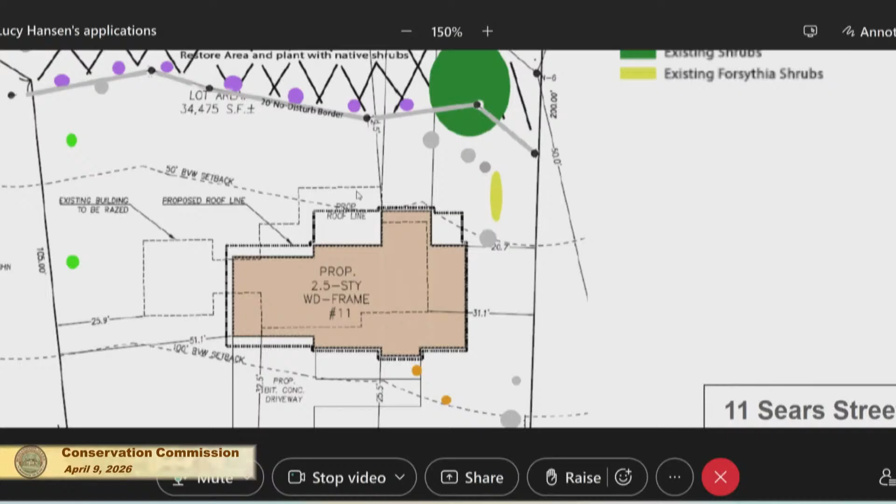We're gonna move the property over slightly to accommodate that further, and only the 2 small ones in the very front, those are the only 2 that will be removed, to be replaced by 2 other native trees on this side of the property, which is a pretty wide open area right now between the 2 property lines.

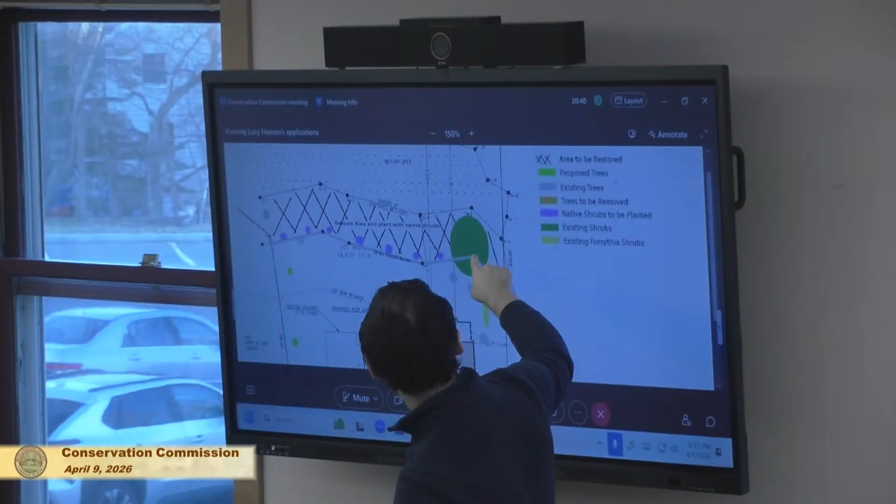Additionally, the rest of this landscaping plan shows other existing trees here in the back right corner of the property. There's existing forsythia shrubs and other green shrubbery in this area next to the wetland area. The committee asked for a 20-foot no disturb border adjacent to the wetlands, which we are fine with, the 20 feet, with the proposal for native shrubs to be planted along the edge of the no disturb border.

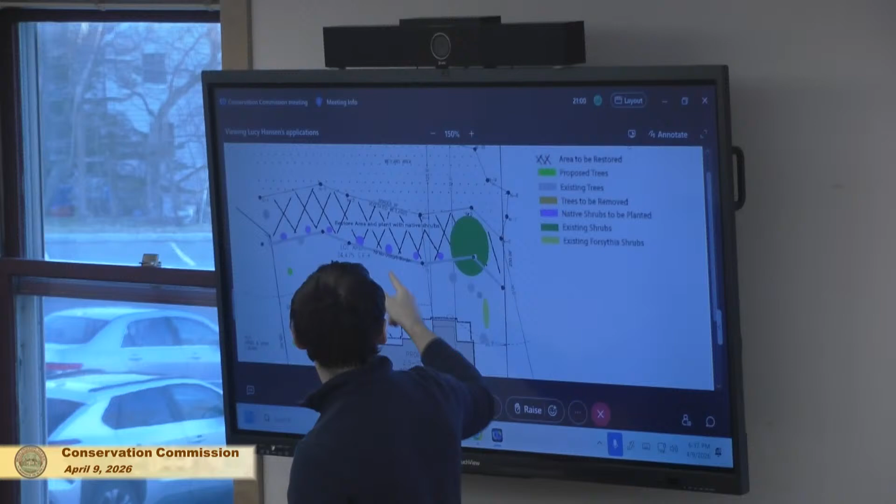Any questions about that landscaping plan? Okay, first we'll go to these people over here, our staff, and then we'll see if anybody else has any. Sure. So Lucy or Eileen? Any questions? No, we weren't sure who was dealing with this. I don't think either of us have any issues with that landscaping proposal. I think it's good. I think he did exactly what you asked. Right. Okay. How about on the commission?

Anybody on the left? Indra or Rob, you have anything further on this? We asked for the 20-foot no disturb, and they provided it. Bill, how about yourself? Nope, I'm happy. Okay. Sarah? I'm delighted to hear you're saving that big oak. Just maybe think of putting some protective things around it, like sometimes people put dumpsters right at the foot of a tree they're trying to save, and that can be a little counterproductive. Just the only thing to consider, but other than that, no issues.

Okay. I can take that note for them. I mean, the front and the left side are the widest parts anyway, so I would be very surprised if they went over there, but I'll take that note for them. Okay, Ed, anything on this? I just either have a point or a question. You're planting lots of shrubs, and behind the shrubs there's like 19 feet. So isn't it the intention that that area would be left unmanaged? That's what you're proposing to do? Yep. Right, so you're not putting mulch down or anything like that? No. Okay, that answers that.

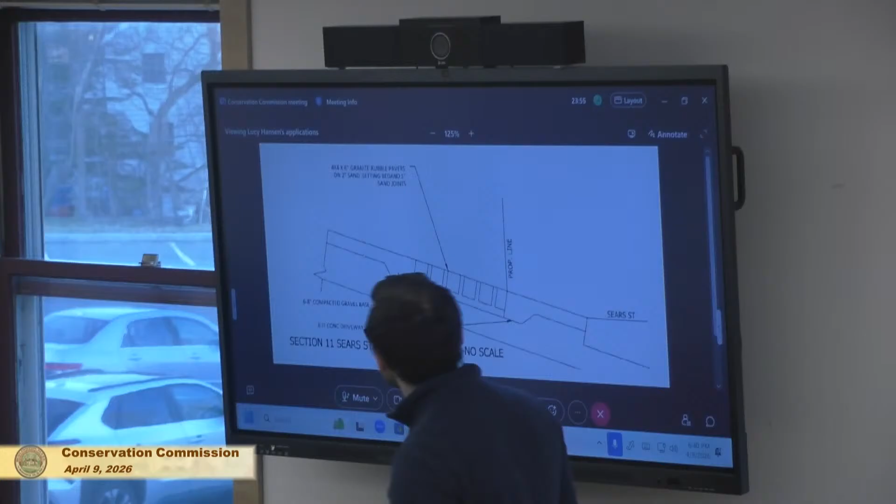Okay. So, the second item from the committee was to provide more detail for the pavers. So, Robert had sent me this update. So you have Sears Street here with the property line. He has 4x4 by 6-inch granite rubble pavers, a 2-inch sand setting bed and 1-inch sand joints with a 6 to 8 inch compacted gravel base, and the driveway with thickened edge. The ask was for more detail. Were there specific details that were being looked for beyond that for the pavers?

I don't remember them asking for more. Eileen or Lucy, is this sufficient detail with what you need for the record? I think so. If your engineer was here, the question I would have would be to double check that the compacted gravel base is permeable enough to get water through, but as far as the detail goes, this is fine.

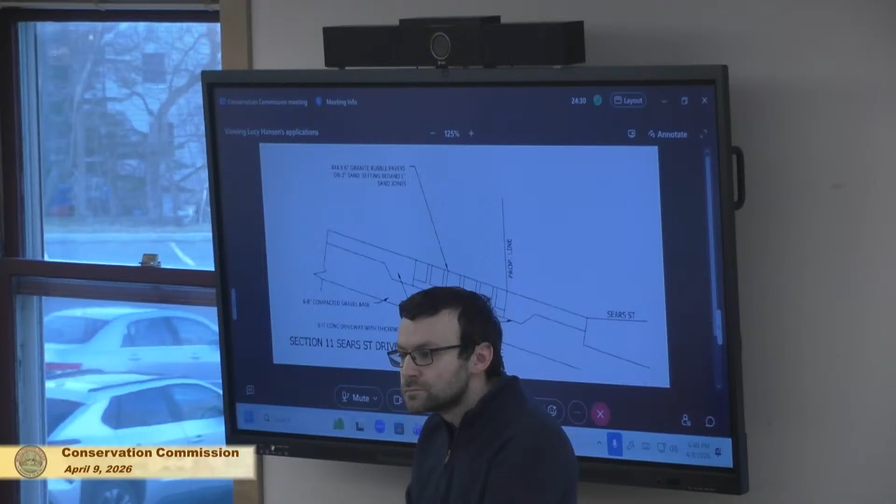And I would assume it's gravel. I would expect it to be on a looser gravel base. Where's the water going? Is it going down to a looser gravel, or is it going into something like a chamber, a dry well? It's just going down there. Right. But this is also they were reducing the impervious, so this is just something we asked for to capture some water, so it could be arguably directing water out also.

This wasn't the discussion we were having about the water table for the dwelling itself. This was for the construction, I believe. I think we're fine. I think it's fine. Yeah. Okay. This is the driveway. Thank you. So that's the last one I have an image for.

Lucy, thank you. The last item was in regards to the water table and water mitigation, since the proposed depth of the basement was about 8 feet for the foundation, and the water table is about 4 feet below the surface. That item, we do not have anything on paper yet, still working that out with the architect, but the plan is to install a French drain system with a dry well basin to capture that water away from the dwelling. So again, I don't have that on paper yet, but that is the plan. So if there's any feedback now before that gets on paper, I'm happy to take it.

That is our proposed mitigation. He said he does have chambers, right? It was previously proposed, yeah. We have comments on that. Well, our comments, just as staff, would be, he knows he has to do a system that's approved by the building commissioner for the groundwater. Our comment would be just to make sure that if they're considering combining that with the stormwater mitigation system, that has to be sized big enough for both. You can't just put it in and assume it's going to work, because it won't.

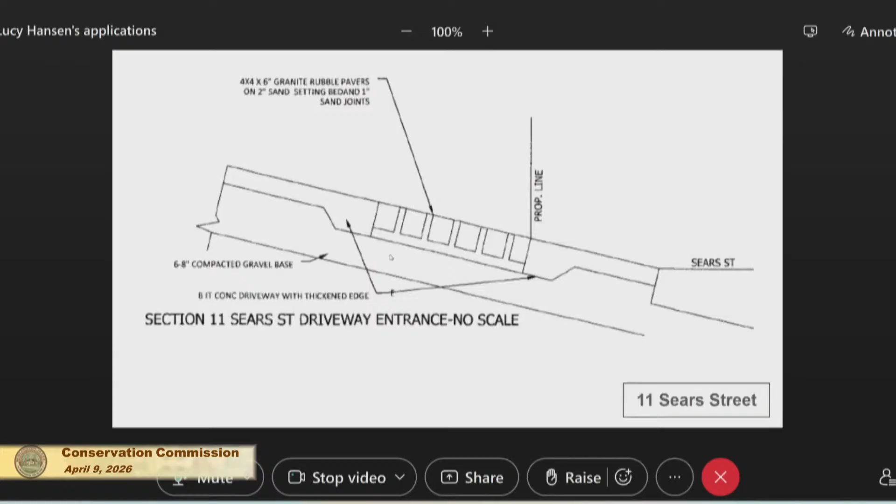I would just suggest your engineer provide a spec for the contractor to follow of what it should be. A spec for the size of the gravel? Right, for adequate drainage, so that it works properly. There's probably a range over which it works, but you don't want it to be impervious, then all that dirty stormwater goes into the street theoretically. Okay?

That's all I have. This is 11 Sears Street, I think. Is there anybody in the audience that has a question or a comment? It's a public hearing, so you're entitled to say something. I guess not. I have one more question. Where is the output from the sump pump going? They haven't designed that yet. Are we approving this tonight? We would suggest not. Oh, okay, good. Where's the output of the sump pump going? We don't know yet.

All right, so it looks to me like we could wrap this up and bring it to a vote at the next meeting. You okay with that? Yep. Gravel size specification and the details on the French drain system. Right, can do. And we'll want a location on the discharge of the water. This is for the mitigation, correct? Yes. All right.

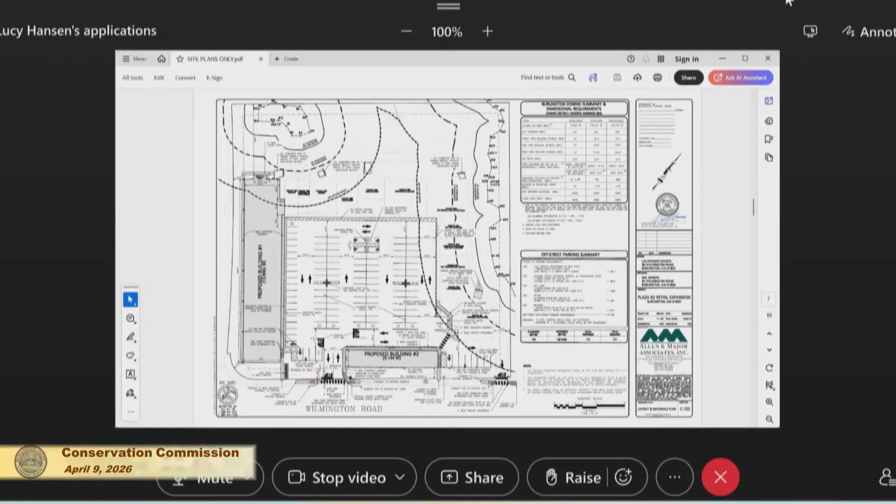I think sheet C102 is fine. It's the layout plan. I know the commission's familiar with this property, so I think we can go everything off of that. Come on. It's moving real slow. Well, everything was combined in one thing. I extracted those site plans and it still is taking so long. Perfect. Yeah, that's good right there. We can go off that. Okay. We can motor around as needed.

Perfect. So to kick things off, this is 85 Wilmington Road that you see on the screen here. It's better known as Plaza 62. As the commission is aware, it's a 3.5-acre parcel. It's developed with an L-shaped retail building right now and surface parking throughout the site. You'll likely remember this lot very well because we just wrapped up the ORAD on this property with you guys. It was issued January 8th of this year. So the wetlands on the site plan were confirmed in January, so we have them valid for the next 3 years.

This is not a perfect north arrow, it's angled a bit to the side, but on Plan East is our main wetland system. It's a bordering vegetated wetland. And then Plan Northwest, which is a little bit off the screen right here, if we can zoom out, there is an isolated wetland.

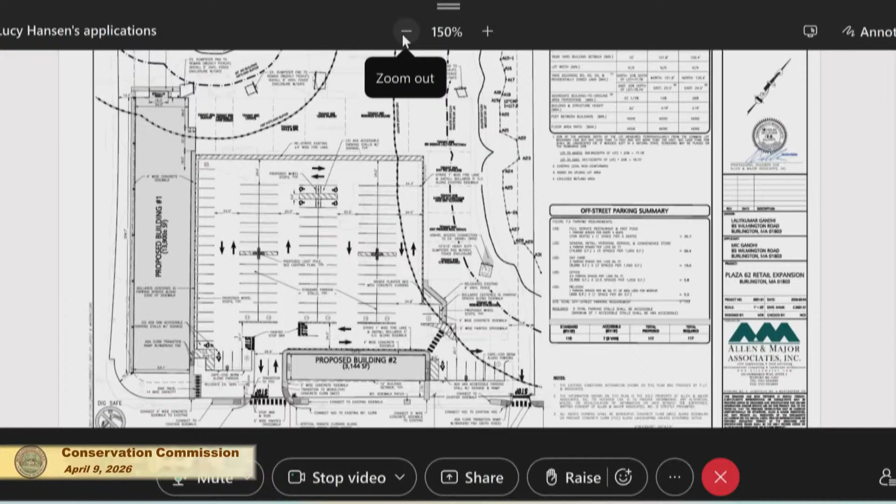If it's convenient for you, you can go up to the screen and move it around and point and stuff. That's pretty fancy. That might be helpful. We like it. You can also annotate if you want. Yeah, let me approve the annotation. I don't think we'll need to for my presentation, but it might be helpful, especially if we have neighbors who can point to things. Yeah.

So, as I was explaining, the north arrow is angled this way, so when I say Plan East, I'm really just meaning the right side. This is Wilmington Road down here. That bordering vegetated wetland system is the line that we see right here. It spans the whole eastern portion of the property. And then there is an isolated wetland that we confirmed up in the corner right here. Because this is a commercial lot, these wetlands both have a 20-foot no disturb zone and a 50-foot no build zone, in addition to the 100-foot buffer zone. That was all wrapped up in anticipation of this, so we can correctly quantify and site the project to be compliant with the local buffer zones.

So the notice of intent before you today is to develop 2 new commercial buildings on the property. One will be a standalone building, one will connect to the existing. As I mentioned, it's an L-shaped development right now. On this plan, it's shown as these squares that are blocked by a tenant, but this is an existing building with surface parking in the center of the site with the wetlands on the exteriors. So there's a few main portions of this project. The first is to construct the 2 buildings as additions, and the second is to repave, restripe, to really clean up the property.

So the intent is to develop the property with a couple additional buildings, as well as really revitalize it, clean everything up, and get it very up to date. So I'll start with the work that's within the buffer zone. So as I mentioned, the isolated wetland is up here in the northwestern corner. A 20-foot no disturb is on my finger here, 50-foot no build, and a 100-foot buffer zone here.

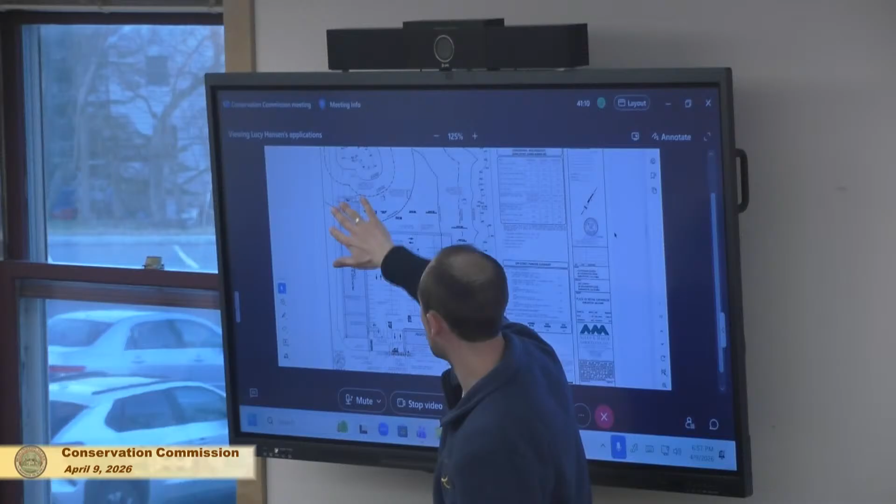But the idea is that the landscaping plan puts trees and shrubs behind the buildings for screening, along the frontage, with a couple in the buffer zone as well. So although it's not necessarily within the jurisdiction of what we're moving in the buffer zone, the trees that are to be removed are still proposed to be replanted through the landscaping plan. So that's a high-level overview of the project itself. We have David Robinson, our engineer, who can walk us through stormwater. So with that, I'll kick it over.

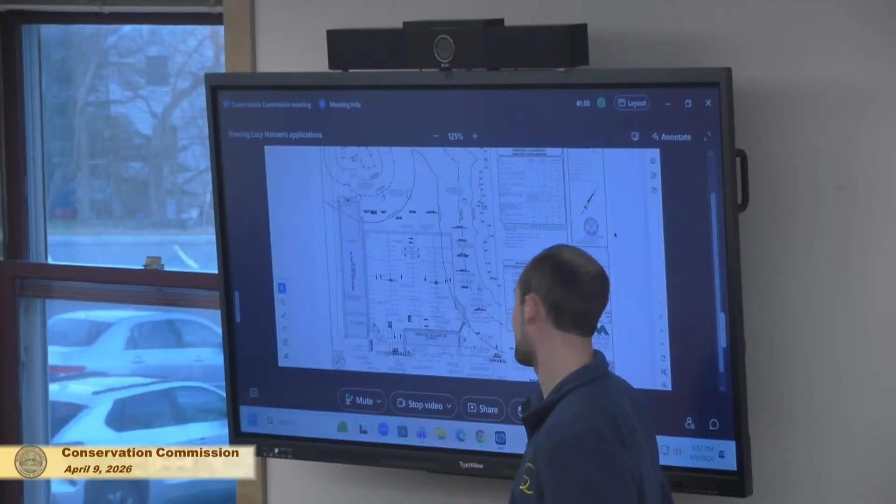Before you do that, could you tell the people who are listening, is this a single story or a double story? Yes.

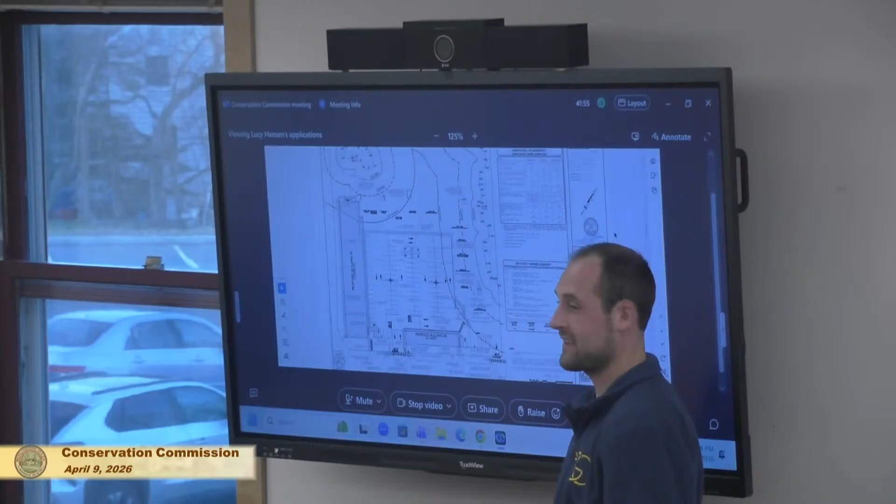Yes, single story, so it's in the match of the existing that we see. And today, they may be interested in if there are plans in place for the kind of use for that space? Absolutely. I'll let the property owner speak to that if I miss anything, but I know that it's primarily restaurant. I know there's places like ice cream places coming in, cookie place coming in, acai bowls, trying to get those other ones. But the idea is to be restaurant, food, bakeries, things like that, and I believe some of them are already leased to come in.

So the plan is that they have this locked in and there should be some of that coming to the area. But if I missed any, please feel free to jump in. Very good. Okay. Yep, that was great.

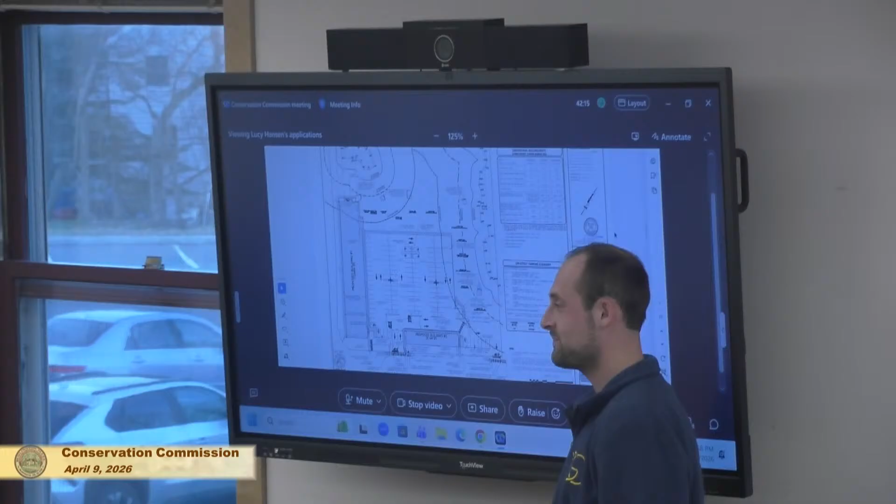Thank you, Andrew. Again, for the record, David Robinson. I'm a project manager with Allen and Major Associates. We are the record civil engineers and landscape architects for the notice of intent before you. I'll quickly walk through the site plans. Maybe we can just start at the erosion control plan, which is sheet 5 of the PDF. Just quickly walk through the erosion control measures just to start. One more, right there. Perfect, thank you.

So yeah, we did put together an erosion control plan to stabilize the site during construction. We're proposing a sediment track-out pad at the construction entrance. And we are going to line any down gradient catch basins with silt sacks, and also put some silt fencing along the plan west side of the site. Those 10 trees to be removed are shown in the bottom left-hand corner, which will be replaced by the 29 trees. And if you can move to the next sheet, which is the site preparation and demolition plan.

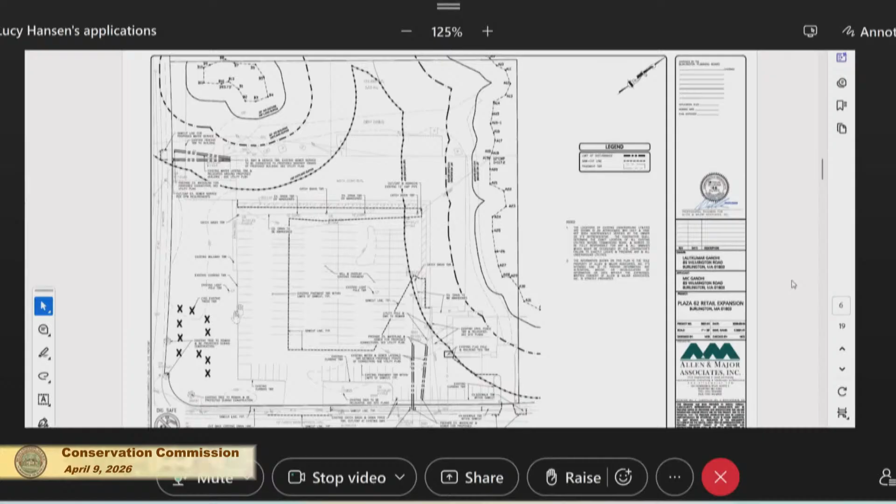This is our site prep and demo. I think the most important thing to note here is that we're saw cutting the existing pavement, we're going to mill and overlay that central area because the grades don't really need to change in there. And then the area where we're proposing our drainage system, it's going to be a full depth reclamation. There is some fill out on the site that we encountered while we were performing stormwater test pits that were witnessed by the Board of Health. We did get approval from the Board of Health as well. All of that fill will be removed, and the top of the fill actually comes down to about 2 inches above the bottom of the drainage system, so all that fill will be removed.

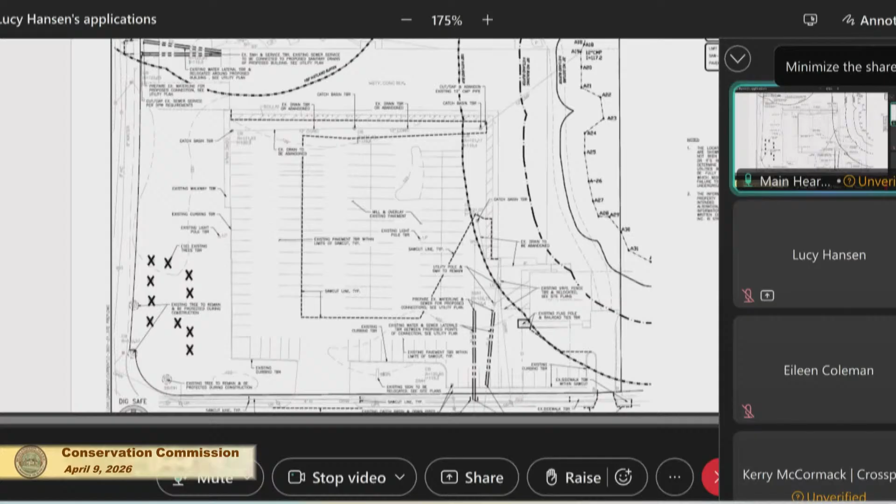I think another important thing to note is that the existing stormwater system on site basically consists of 3 catch basins on the plan north of the site plan here. The stormwater that leaves the site is not treated. There are no hydrodynamic water quality separators on site currently, and the stormwater runoff from the site runs untreated to the northeast corner to the wetlands via a 12-inch corrugated metal pipe underneath the existing building.

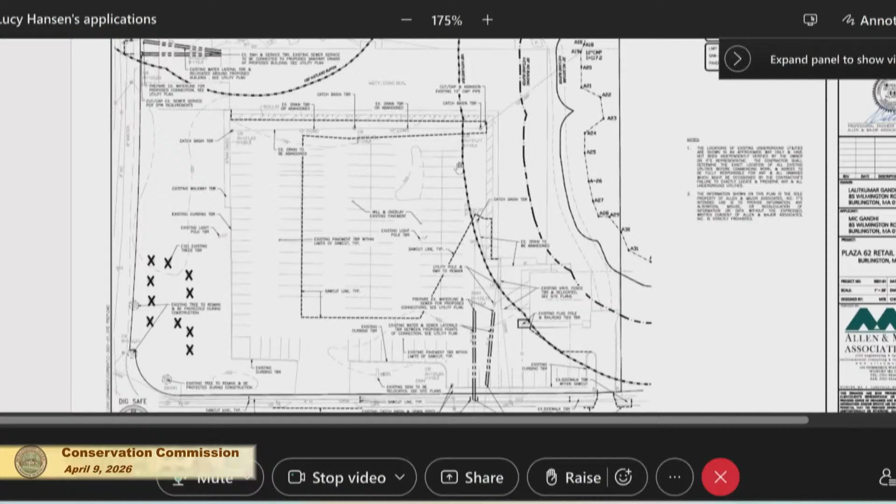So to rectify that, you can actually scroll down to the stormwater plan if you don't mind. To rectify the existing untreated flow to the wetlands, we're going to keep the catch basin locations where they are, reutilizing the existing grading, so maintaining those low points. We're going to pull out the existing catch basins, put new ones in the same locations at the low points, and then treat all the water using 3 different water quality units, which funnels the treated stormwater to a large proposed drainage system that you see on the left-hand side of the plan.

So all water will be treated before it runs to the drainage system, and the roof runoff runs directly into the stormwater system. It's considered clean. There's no need to treat that. However, for building 2, the roof runoff does run through the quality unit. There's no harm there, but that's just kind of the way that the drainage laid out. So the drainage system is designed to be an infiltration system, so it'll be recharging the groundwater with the stormwater runoff instead of just directly discharging the untreated stormwater to the wetlands, which will help to recharge the wetlands.

There is an emergency overflow connection to the MS4 shown. There is good sandy material out there to support the infiltration, and we did perform a groundwater mounding analysis, since we have less than 4 feet of vertical separation to the estimated seasonally high groundwater table, which shows that the stormwater drains down below the level of the system at the end of the 72-hour drawdown period.

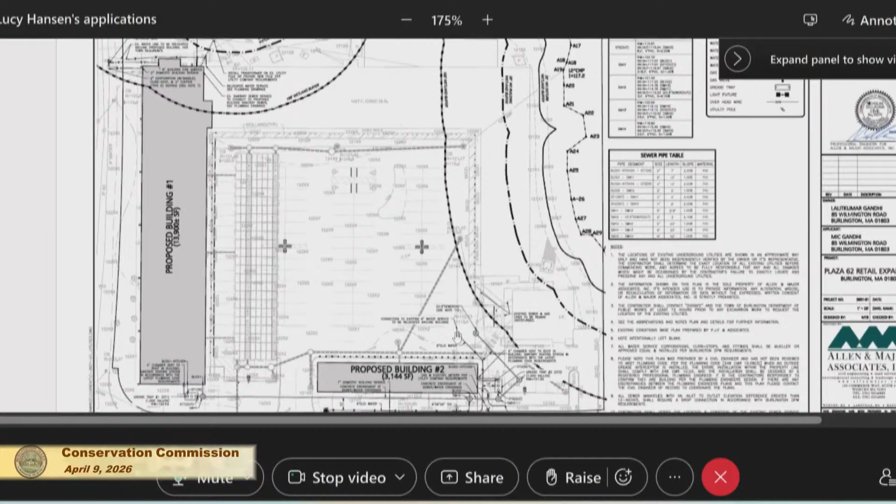I think that's a good overview on the stormwater. If you want to scoot to the next sheet, the utility plan, I'll just quickly walk through. As Andrew mentioned, there's a number of restaurants going in. Each building has a dedicated and adequately sized grease trap to handle the kitchen flows. We had those approved by the Board of Health about 2 weeks ago. And then just typical utilities tying into the existing infrastructure on site: water, tel data, electric, sewer, the grease traps, and gas. We're also proposing a couple new utility light poles on site to keep the site well lit.

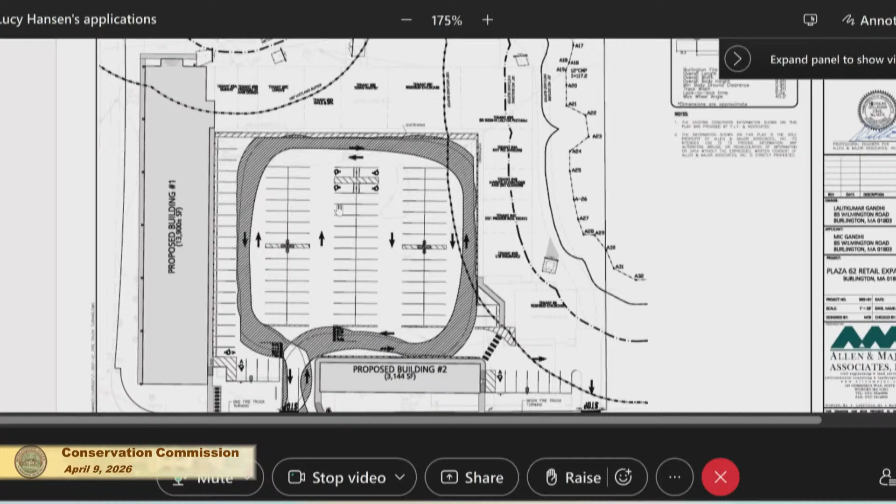And if you run to the third to last sheet, I can quickly show you the landscaping plan that we're proposing to replace the trees that are to be removed. As Andrew mentioned, there's 29 trees proposed, whereas we're removing 10 trees, so there's a good ratio of replacement. You can see on the left-hand side that there's shrubs and trees along Prouty Road to screen the rear of Building 1. There's shrubs and trees in the perimeter landscaped areas, and then there are shrubs and trees behind proposed Building 2 to the south there to help screen the building.

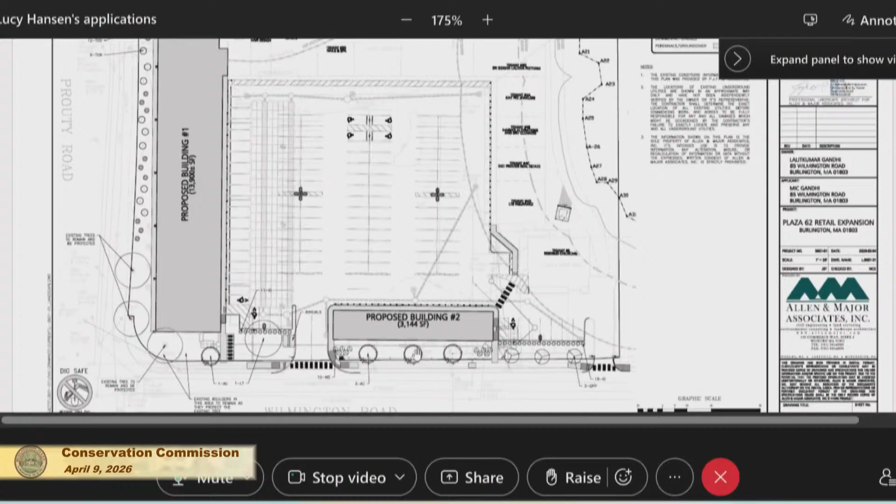And real quick, just for aesthetics purposes, proposed Building 2 along Wilmington Road is going to have really nice windows, and it's going to be a nice looking building when you're driving by on the street. It'll be screened by landscaping, and it's not just like a brick wall or something like that.

One final item for the site: there is an existing gravel driveway that wraps around the back for access to the refuse collection areas. We'll be screening the existing dumpsters. None of that is changing, but we are adding one dumpster at the bottom right-hand corner. They're all supported on concrete pads. And I believe that you looked at that yesterday at the site walk. I think that's everything I have now. I'd like to open it up to questions and comments from the board at this time.

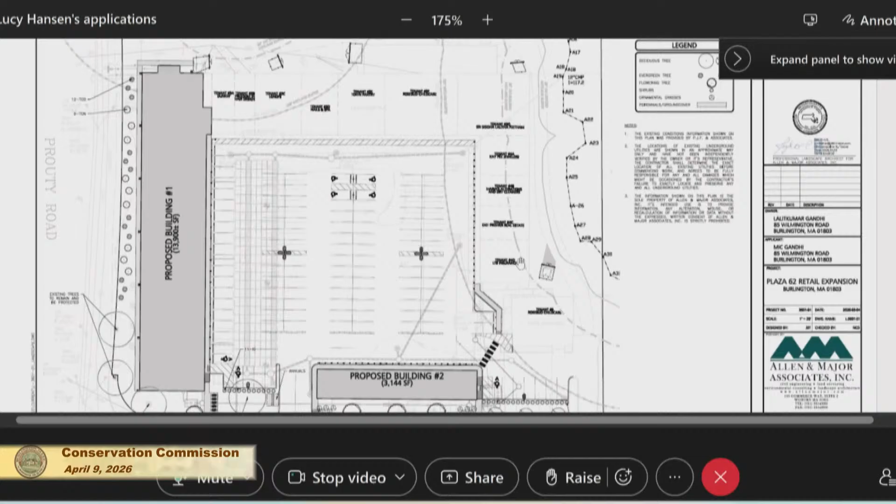All right, could you please go a little bit more slowly over the stormwater routing, just so everyone's clear what is going where? You can go up there and point. That is touch sensitive over here. This one? Oh, only this one? I think so. Well, it might be, but it's easier for the commission to see that one. There's a shine on this one. So it would be helpful if you could take each building and the parking lot, and explain where each is going and where it ends up. It would be very helpful.

Sure, so here's obviously the parking lot. Everything pitches to low points. There's catch basins here, here, 3 at the rear here. So all of the parking lot area will be captured by a catch basin. There's even one over here. And Building 2 and this area of the catch basins all flow this way through a water quality unit here and into the drainage system. There's an isolator row hatched out here and another one here at the inlet of the system. Building 2's rooftop is going to the isolator system. Building 2 discharges here, runs this way through a water quality unit with an isolator row. Yep. So Building 2 runs this way onto this end of the drainage system.

All right. The proposed Building 1, you can see the 3 roof leaders that tie directly into the drainage system. Since it's clean roof runoff, it doesn't need to run through a water quality unit per Mass DEP regs. And then these 3 catch basins, which were existing, are going to be replaced. These 2 catch basins run through a water quality unit here. This catch basin is actually a water quality unit with an inlet grate. So water just goes in through the top, it's treated by the water quality unit, discharges to the drain manhole, and all of the inlets have an isolator row, which helps to trap the sediment, and it makes it easier to vac out when you're maintaining your stormwater.

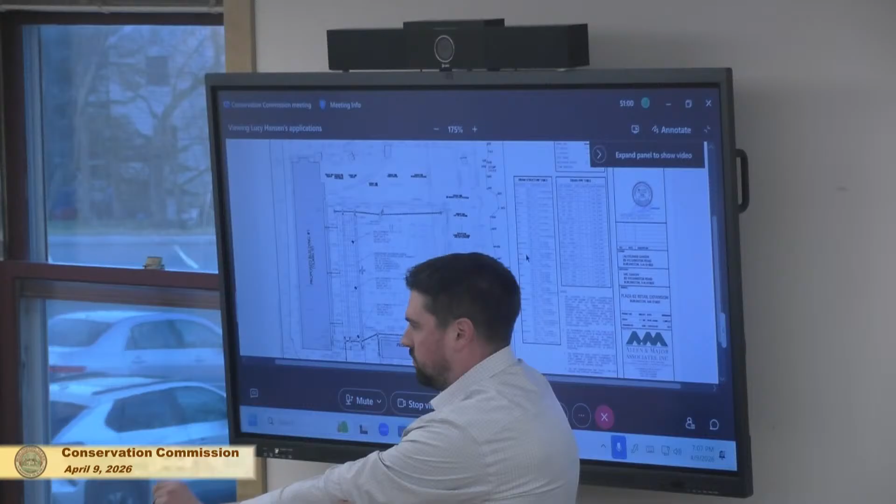So it's going to the isolator row on your drawing here? Correct. There's 2 isolator rows here. Yeah, okay, got it, see it. Where is the water quality unit on the bottom? I can't seem to find it. Right here. It's labeled DMH18W. Oh, there's the WQU. Okay, I got it. So basically, you always want it at the end of your chain, so it's the last thing that treats the water before it discharges to the infiltration system. And could you talk about the existing buildings? What's going on there?

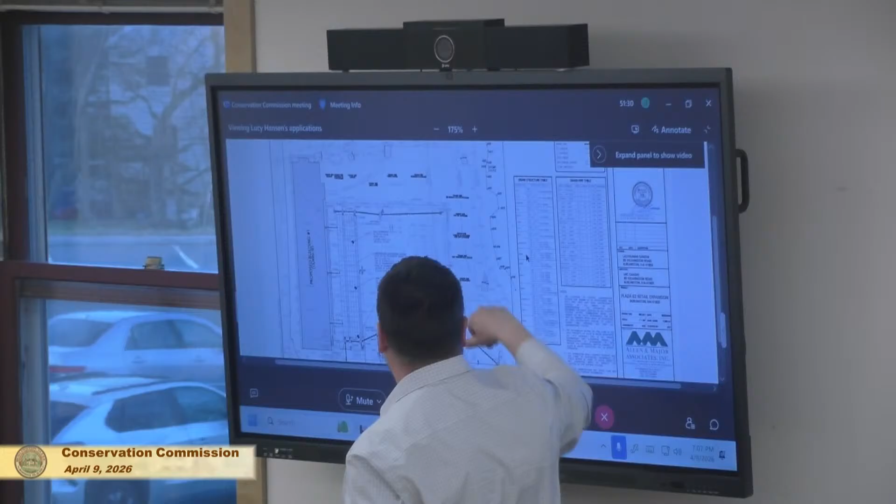Yep, so the existing buildings, we're not changing any of the drainage patterns. They discharge via downspouts to the rear of the site, and there is that gravel road at the rear. I think you guys saw that at the walk yesterday. Right, okay. But we're not changing that. Okay, that was helpful, thank you.

Yep, absolutely. Okay, so first we'll go to comments from either Eileen or Lucy, and then we'll see the commissions, and we'll take note of issues that need to be responded to, so you go away with as complete a list as possible. Yeah, I appreciate that. Okay? Okay, so I did actually give a list of some questions that I had a couple of days ago, some of which you did touch on, and I still have some remaining.

Sure. So, as they explained, building two new buildings with fairly significant stormwater treatment, because this is going to be treated as new development under the stormwater standards. The landscaping, 29 trees, 29 shrubs and ground cover on the landscaping plan, on the whole, I think that's pretty solid. My only comment on that would be, you've got a number of cultivars in there, and we would prefer that they be straight species. Okay. Even though some of them are outside the buffer, we would just... Even if it's a native cultivar, you want the, yeah, okay. It would be our preference. It's up to the commission, though.

Sure. Then when it comes to stormwater, as they described, a great big system with 192 chambers, is that right? That sounds like it. Yeah. That was a lot. Whatever that says, 192 Cultec. Yeah, a lot of chambers. I like the fact that so much of it's going through the water quality units and the isolator rows.

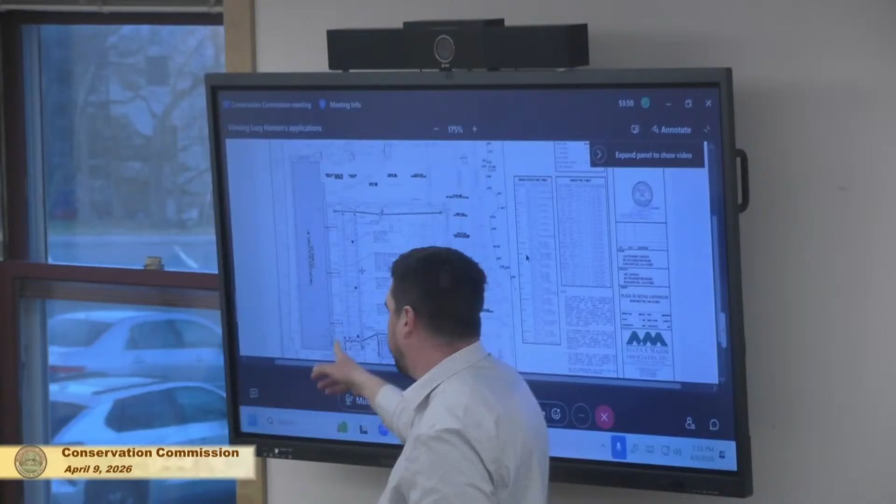That's a good point. Basically, what Eileen's saying is that typically you want to reduce both your peak rates of runoff, which is like the flow leaving the site, and the volume of water. And for the 100-year storm, for what's leaving the site, it was an increase of about 1.4%. But I think that there's a really easy fix to that, and that involves raising the weir elevation from the outlet control structure. You may only need 1/10 of a foot, and that's going to hold back a greater volume on site to be infiltrated into the ground and recharge the groundwater.

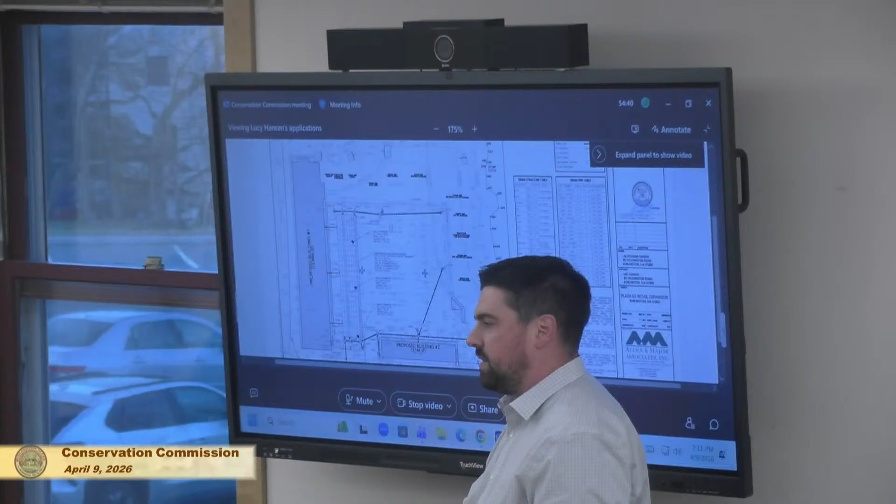I did check, there's plenty of room to raise it up, so we're going to bring that up. Hold it back a little bit more, less will overflow into the MS4, and more will be retained on site. Where is this, where you're going to do that? There's this structure at the bottom left-hand corner, right before it discharges to the municipal system known as the MS4. Got it. That's an outlet control structure. Basically, that controls everything leaving the infiltration system via a weir through the middle of the drain manhole structure.

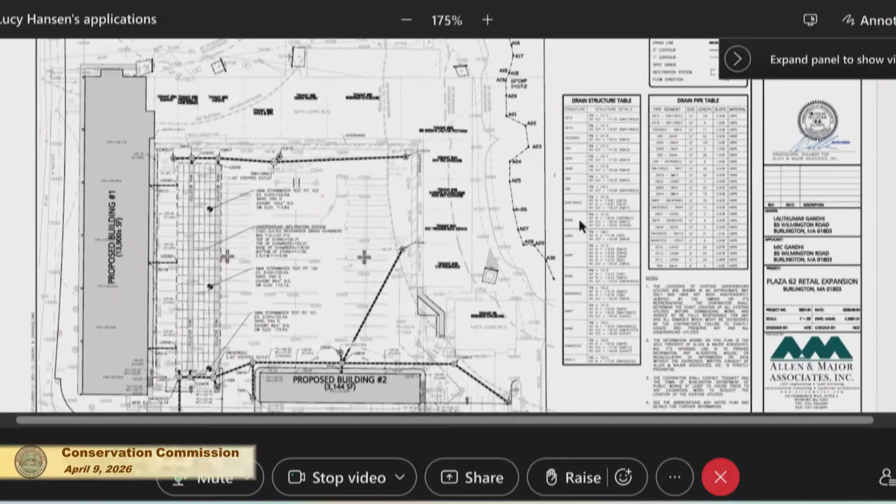And we play around with the height of that to ensure that enough water is being held back so that we're decreasing the rates of flow and volume leaving the site. So in our next submission, we'll look at adjusting that weir height a little bit higher to hold more back so we meet that 100-year volume. I appreciate that, because that was my bigger concern, is that, you know, we deal a lot with the MS4 coordination. So even if it's treated, we prefer that you're not discharging to the MS4 where you can avoid it. I completely understand, and there is room to do that.

Let me see. You've actually dealt with a lot of my points, so that's good. I had the question about the rooftop water. You dealt with that. I did want a little bit more clarification, or the commission might want some more clarification, on how the mounding analysis works. Because what they were showing is that the groundwater table is only about 2 feet below the chambers, which is the minimum, and you need to do a mounding analysis if it's anything less than 4 feet differential. Right. So what kind of analysis? It's a mounding analysis. Before you explain, can you just let me get through the rest of my questions so we can do that together? Yes.

And then we can go to the chart. It's a mounding analysis. He mentioned it, and there's a one-page kind of summary in the report, which I've only looked at once or twice before. It's detailed. Yeah. So I would appreciate it if you could explain a little bit about how that works. I mentioned the checklist.

I had some questions about the long-term pollution prevention plan. It wasn't actually in the, I mean, maybe you intend for it to be more of an overall thing, an umbrella term, but I'd need a clarification on that. The O&M plan didn't include cleaning the isolator row, so that's probably going to be an update. I know you have that on your list. What about the isolator row?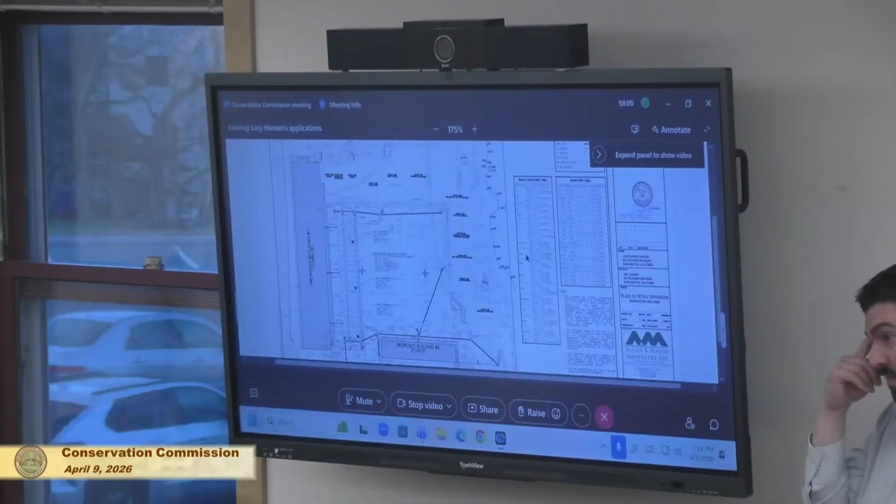I did have a question as well about the phosphorus loading, and as I said, it's not that I don't think that you'll meet the numbers, there were just some discrepancies there. So if you would all indulge us, can we have a little explanation of how they are making it work with such a small distance to the groundwater? The mounding analysis? Yeah. Okay. So I think it's helpful if we pull up the drainage report and just have something to look at that I can explain. I don't want to get too involved, but I'll try and give a quick overview because I can answer a lot of these questions very quickly.

Thank you. And if we don't understand, maybe you could send us something to look at so that we can all understand it better, like a nice video. Yep. Let's try 130. It's down right at the very end. Oh, it's at the end. Did you compile everything? It's all in one booklet. It's a big one. It was a really impressive document.

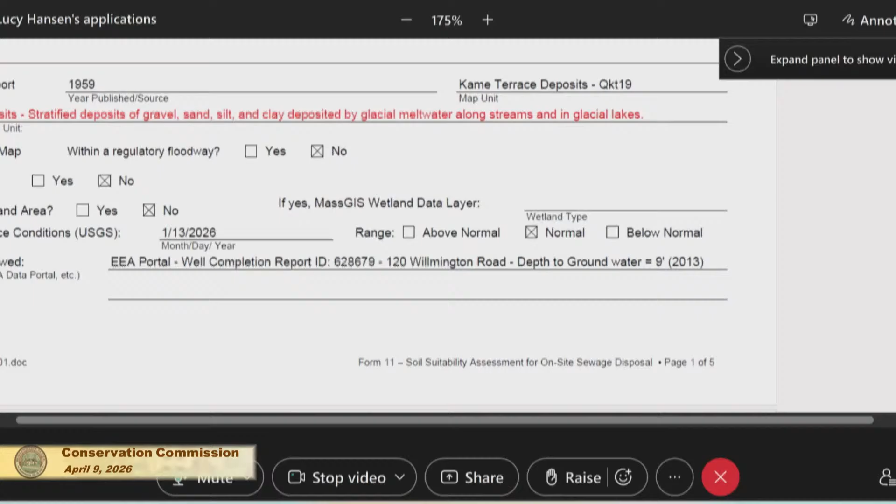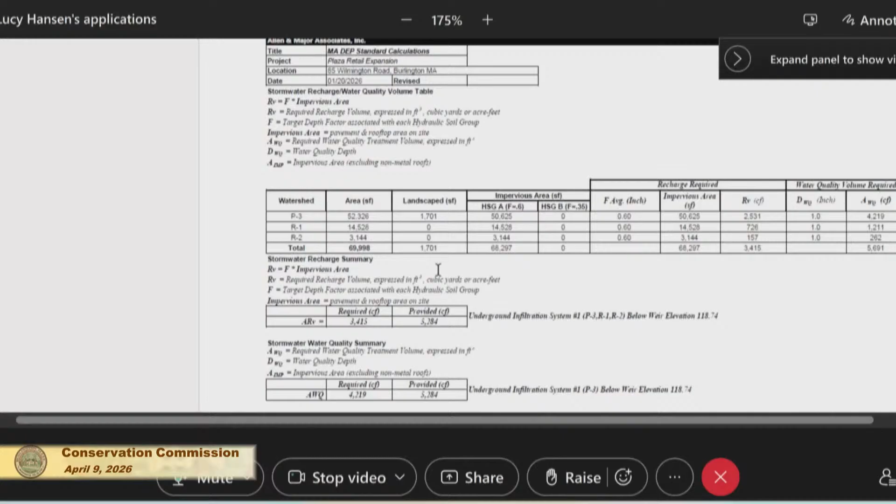So if you scroll way up on the drainage report. Is it at the top or at the end? It's one of the last pages. So the long-term pollution prevention plan was included in the drainage report under section 2.0. There is actually an LTPP provided. On my drainage report, it was on PDF page 27. So if you scroll way up, maybe dozens of sheets. Well, if it's there, then in that case. Now you're finding the pollution prevention plan? You were on the mounding analysis. It's up in section 2 and you're in section 4. It's like 100 sheets up. Maybe we don't need to get into that and we can look at that another time. But it's in there on page 27. I made a note of that, page 27, PDF.

We've scared Adobe. Oh, no. She's nervous.

Are you going to provide an explanation of the mounding analysis? Because I'm not sure anyone here knows anything about it. Yep, I definitely can. You're going to have to scroll down. Oh, she's loaded again. Okay, great. Scroll down further. We're almost there. It's calculations all marked up with red text in Adobe, so we explained every single line item, but it's still very complicated, just like the phosphorus calcs. Maybe you can just explain to the commission what it is. Keep going, no, go up, sorry. It's just easier if it's on the page in front of me. Oh, I forgot that this has a lag. I apologize. Right here. Great. If you can zoom out. Yes.

Okay, so a mounding analysis is required when your seasonally high groundwater table is less than 4 feet from the bottom of your system. You always need to maintain 2 feet from the seasonally high groundwater to the lowest point of your system.

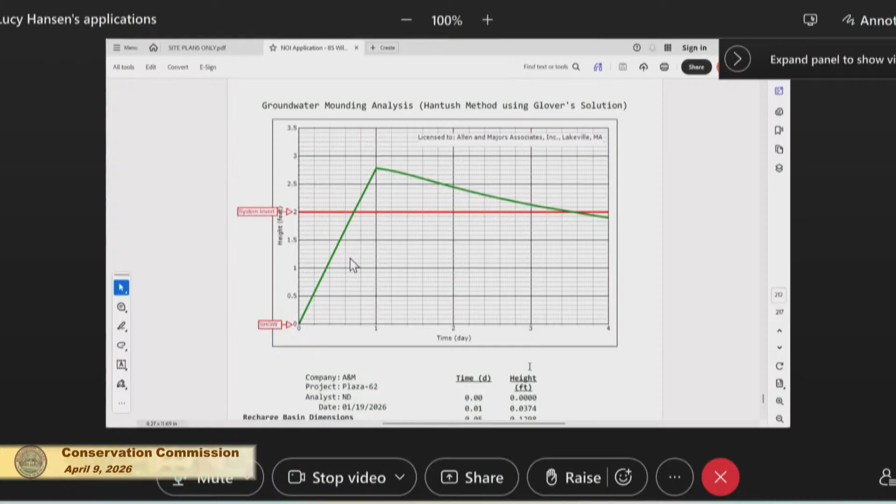So if you look at this drawing, basically underneath here are all the calculations that we look at. It's the length and width of the system, it's the porosity of the soils, it's different coefficients for the soil type. In this case, we have sand as our native soils. And this is time on the bottom, day 0, day 1, which peaks from the 24-hour storm, and then your drawdown is 72 hours or 3 days after that.

And the red line here is the system invert. It's 2 feet above the groundwater table. This is the seasonally high groundwater table at the bottom. So what you're looking at is at the end of 4 days, you want to ensure that the elevation of your groundwater is below that 2 foot, so that the water's not going up into the system and it can't drain down. It needs somewhere to drain down.

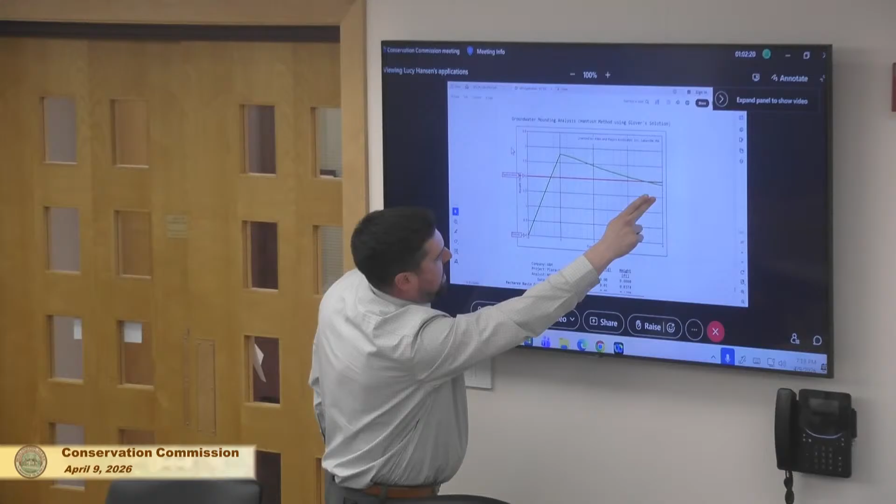So here's day 0, water comes into the system, it's filling up, as it hits its high point, it's backing up into the system, and then it has the 72 hours to drain down. You can see it slowly drains down, and after the end of 3 days, after the end of the storm, it's at 1.9 feet of separation, whereas you need 2 as the minimum. So in other words, the mound drains down enough to be below the bottom of the system.

With what you've given us so far on that, let's see if the commission has any questions yet. I just want to make sure I understand it. So it's permissible for the groundwater to actually rise up into the infiltration chamber as long as it decays down within 72 hours? That's exactly right. But if at the peak of the mound, it's into the infiltration chamber, does that compromise the ability of the infiltration chamber to work properly, causing it to overflow through the overflow?

Well, it would overflow. If it's such a big storm event that it's full and it's backing up into the system, it's going to hit the overflow. And that's considered normal? Yes, that is within the regs. Okay, got it. And we did invest in specialized groundwater mounding analysis software. We took a whole day and trained our company on how to use it, and it's called the Hantush method. Is this the first time you've used it? No, it's been years.

Really? Okay. Can we just get a clarification on something? You said 72 hours, but that's showing 4 days. Yep, so it's 72 hours after the 24-hour storm. So one day it fills up for 24 hours, that's your storm event. And then the drawdown, like you may see in the DEP standard calculations, you want to make sure that the system's drawing down within 72 hours.

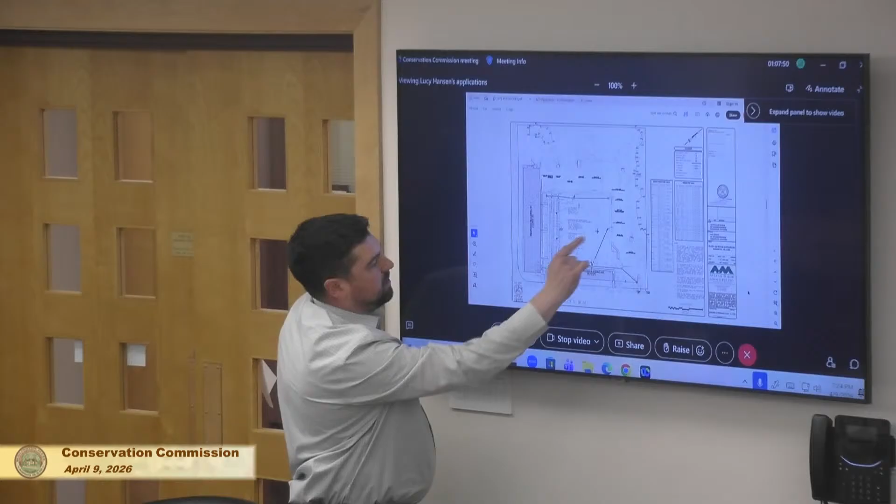Okay. And one more thing, though it's not really required, if the entire parking site is being redone with lights and everything, if there's any sort of green permeable things in the parking lot. I understand it's somewhat of a small parking lot, but... The only lights that we're doing are these two light poles in the middle that have four heads on top, just to throw light out. But there's green areas on the perimeter of the site.

But within the site, it seems like there's a lot of bollards and stuff. Sort of like plantable bollards or anything breaking up the area? The fire lanes are really small out there. We need to meet our minimum parking. Okay. But there are existing bollards along the building currently, so we're just matching that same scheme. And we did get approval from the fire department on running the fire truck through there and the layout that we proposed, so we did get that on the permitting portal.

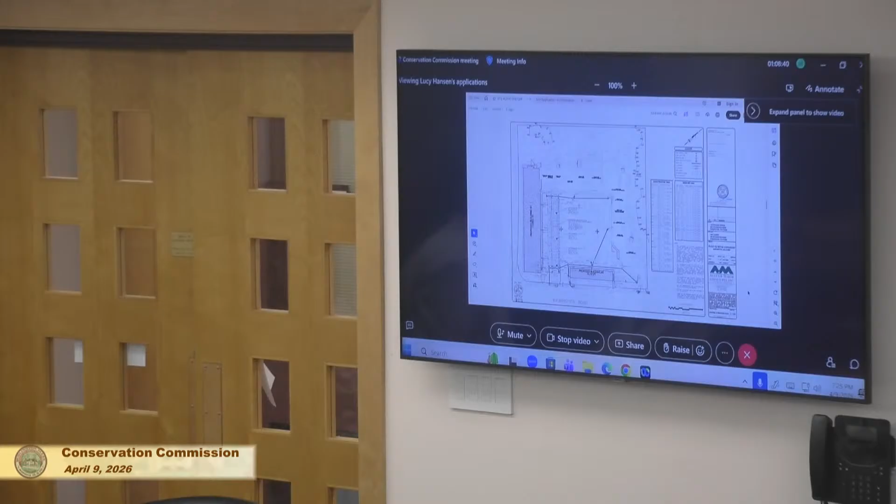Okay, let's go to Ed. Any questions on this? How about Sarah? I'm just curious how you clean that extremely long isolator row. Does it have a manhole that a person can go down there and do it, or is it just done remotely by a Vactor? It's remotely by a Vactor. And is it macroscopic chunks of trash, or is it more like silt that you're trying to get rid of? There shouldn't be any trash in there because the catch basins have hoods, and the water quality units really do a good job of that first flush of sediment and hydrocarbons, which get trapped in the water quality units.

What we do is there's a manhole on the end of each of the isolator rows with a large diameter pipe, usually 24 inches, and they have like an 8-inch vacuum. It's very powerful, and they shove it down and run it the length. What you find, honestly, is that a lot of times the sediment stays in the isolator row, but it kicks to one end or the other based on how it's flowing in. So it accumulates in one area, and it's not dispersed along the 100 and something feet.

Okay. All set? Bill? I want to follow up on something that Rob asked, the overflow. Just to be clear, where does that actually go when it leaves the property? Does it go to an existing underground pipe, or does it dump in the street? Existing underground pipe. Is that a sewer pipe or a storm drain? It's a drain, it would be a stormwater pipe. Okay.

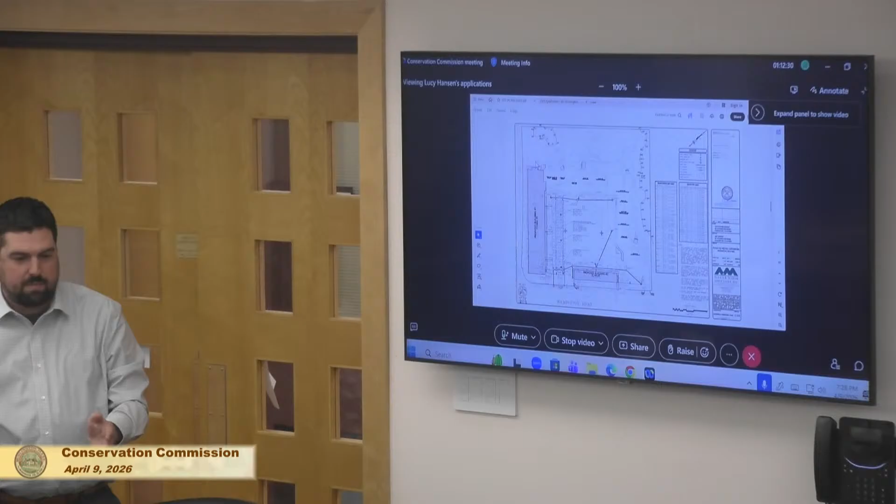There's two rows of chambers before the isolator row. And the isolator row is basically just a piece of fabric that holds the sediment on top so it doesn't go into the crushed stone underneath and clog it up. Right. And there's no direct connection. The chambers go to the top of the crushed stone. The crushed stone underneath fills up with water and kind of comes up underneath it. But this water is not being fed into the isolator row, and it's not being treated because it's clean roof runoff, correct? Correct.

Yep. Now let's go to building number 2. I have a similar question. You are taking the rooftop water, am I mistaken, and mixing it with the parking lot runoff? That's correct. And then you're feeding that into the isolator row? Through the water quality unit first, and then into the isolator row, yes. Would you get enhanced performance by separating the two, putting the rooftop water into the non-isolator part of the chamber? It'd be one extra pipe. That way you wouldn't churn up the dirty stuff as much. I don't know if it's better or not, I'm just asking.

It's a good question. I think it's six of one, half dozen of the other. It's a small building roof, only 3,000 square feet, a small percentage of area compared to the parking lot. If it were a bigger building, it might make sense. We can look at routing that roof drain from building 2 directly into the stormwater system, not in the isolator row. But as designed, it meets the regulations. It's enhanced treatment that's not really needed, like a bonus. But it's a good point. I do understand your point about the 3,000 square feet versus the parking lot. Okay, so why don't you take a look at it and tell us what you think.

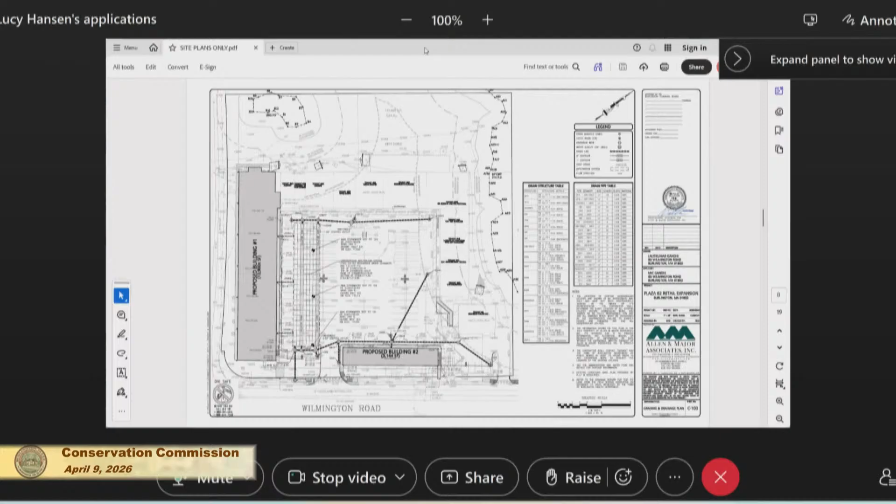We don't really like open discharge points like that. If it can recharge naturally through the groundwater, it's much healthier for the system. Yeah, it's eliminating scour and erosion too from that point discharge, from that 12-inch pipe. You really just want to keep the water on site as much as you can. That's why I talked about raising that weir up, holding more water back.

So what you're saying is that having a discharge right at the wetlands is being replaced by water infiltrating 300 feet away, and that's okay? Because it'll recharge the groundwater, which is where the system is fed. You're saying that's okay because you're infiltrating 300 feet away, but does the groundwater flow in that direction? It would naturally flow to the low points.

Not the whole site, but portions will flow to the low points of the wetlands. The eastern portion of the site generally pitches that way gradually before the slope. So yes, it will recharge the groundwater in that area. So groundwater infiltrated over here will migrate to the wetlands? Correct.

Okay? Yeah, and I will say this system, since it's so heavily groundwater fed, that surface runoff point is not contributing significantly to the hydrology. It's a very small portion of the water that's there, and it's much healthier for it to come naturally through the groundwater than to be discharged through a pipe. All right. You guys are the experts, so I take you at your word. Absolutely.

And how about, I realize that Building 2 is barely in the buffer zone, but I noticed on the isolated wetlands, around the back of the building, that a little bit more of Building 1 is in the buffer zone. Can we do anything about pulling invasive species or something of that nature? I think it's pretty heavily, I might be wrong, but I thought it was pretty heavily invasive in the buffer zone to the isolated one. Is that something you would consider doing? And Eileen, you want to comment on it at all?

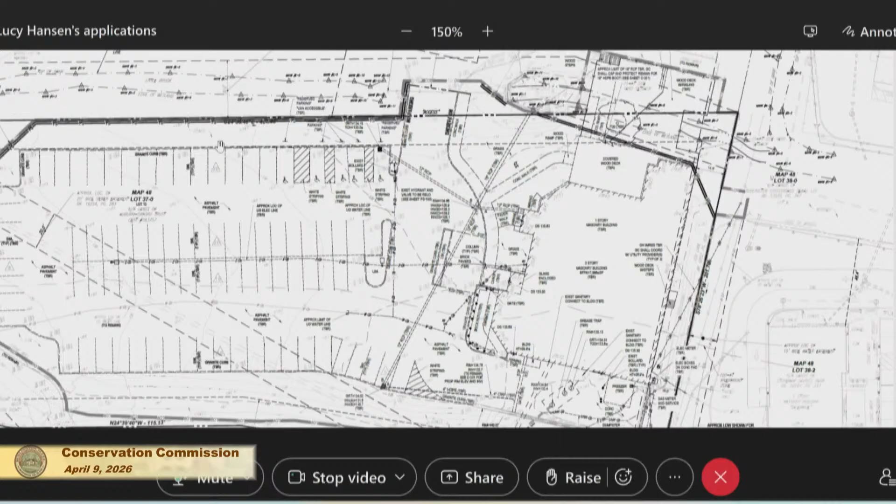Yeah. Excuse me a second. Sure. I think there's someone watching this. If you'd like, you can sit anywhere around here to get a better view. It's up to you. Okay.

So again, it's for the use of the pizza restaurant on the sort of north end of the building. There are 2 uses, Tea Mezcal on the south side and then a pizza use on the north side of the building. So under the existing condition, stormwater is collected via a few catch basins. It's all basically being conveyed to an existing head wall. It's kind of in the same area as where that existing deck is. So it head walls in, there's a few pipes within that area. I believe a portion of the stormwater north of our site also head walls into there as well. And there's no existing water quality units at this site. The catch basins do have deep sumps, but they're not hooded, so you're not really getting that water quality benefit.

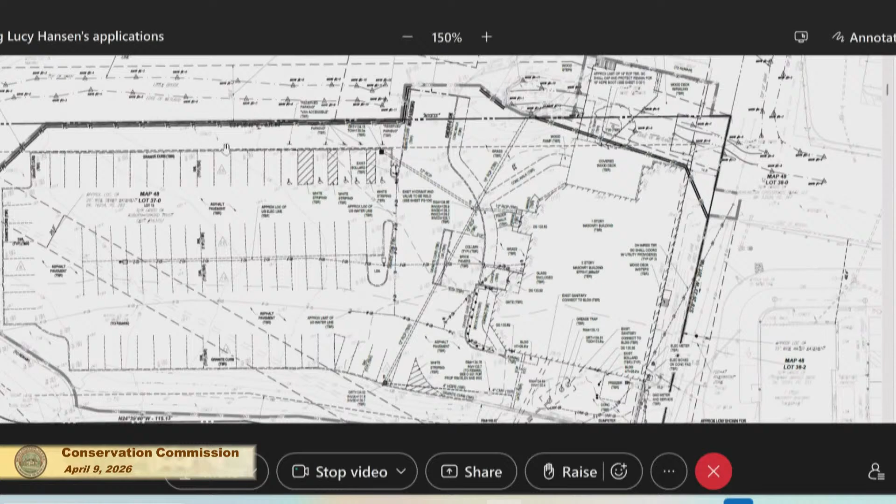It is sort of just being discharged towards that head wall today. At one point, there were some stormwater improvements. There was a dry well added to the south side of the building that captured a small portion of the existing parking area, and it just added some groundwater infiltration. The proposed plan proposes to keep that dry well. We've got another area that's going to be conveying stormwater to that dry well, but we wanted to keep that in place as it was providing some additional infiltration for the site. But for the most part, roof drain, existing parking, everything is collected and conveyed to the head wall directly into Little Brook today. And if you don't mind switching to the site plan, which is the next sheet.

So under the proposed conditions, the existing building would be demoed. There'd be the construction of a new Chick-fil-A restaurant. This building is actually smaller than their prototypical size building, just because there's a lot of constraints on this site due to the property boundary. There's an existing retaining wall on the southern edge, south of the building, that ranges from 4 to about 9 feet. We're not wanting to disturb that wall, keep that in place. We're sort of squeezing the drive-through and the building into essentially where the existing building footprint is today, and really trying to limit the amount of disturbance in this lot. As you can see, the parking lot generally follows the same layout as under the existing condition, albeit just changing the traffic flow through the parking lot to one-way versus the two-way flow under the existing condition.

There are about 80 parking spaces today, and the parking lot is being reduced to, I believe, 63 total parks. So a reduction in parking here, but again, an appropriate amount of parking spaces for this use.

So under the proposed condition for the drainage, again, we're looking to improve. This is a redevelopment, but we are looking for improvements through the reduction of impervious coverage. So we do have a minimal reduction here. I think we're looking at about a 2,500 square foot reduction of total impervious coverage.

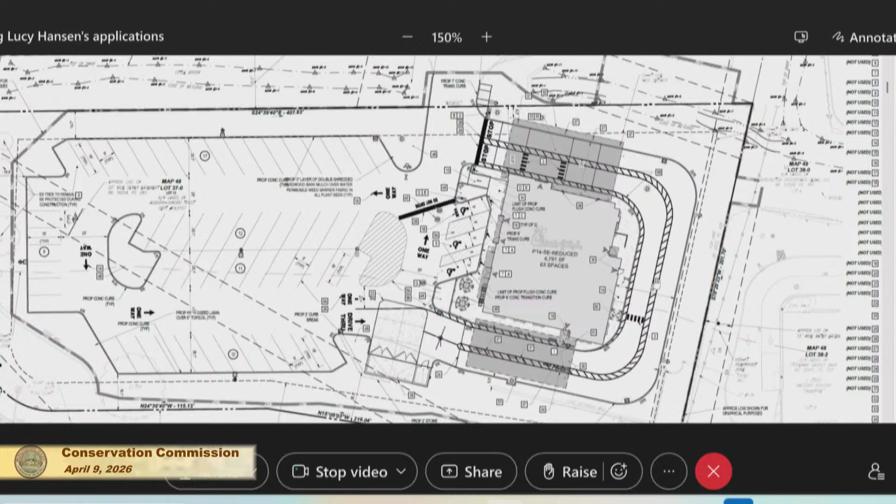Grades on site generally follow what exists there today, and we're really limiting the disturbance to the building and the drive-through area proper. The remainder of the parking area will likely just receive a mill and overlay throughout, as we're not really changing the grades there. As far as the drive-through and the building, there'll be more disturbance in those areas, but the parking lot will basically just match existing grade as it is today. And that's it. Happy to answer any additional questions for this application.

I would like to add very briefly before you turn it over for a comment or question. We did receive a DEP file number, and as of last checking, even this afternoon, they've issued no comments from DEP.

Could you give us just a little bit more detail? The parking lot is all being collected on the whole site through deep sump catch basins, and then it's going to the one water quality unit? Correct. And then where does it go from there? So the water quality unit, actually, I'll go up. It would be helpful. One real quick, yep. So we're all clear.

So under the existing condition, there's a head wall location here where I'm pointing. Right here. So currently, all the stormwater is collected and it's routed towards that head wall and discharges towards Little Brook. We're keeping a portion of that line there, so we're not disturbing within the brook, and we're not disturbing that head wall. We're replacing a drain manhole where my finger's pointing here. This is just a standard drainage manhole, and the reason for that is that's in line with that existing 12-inch outlet that goes towards the head wall.

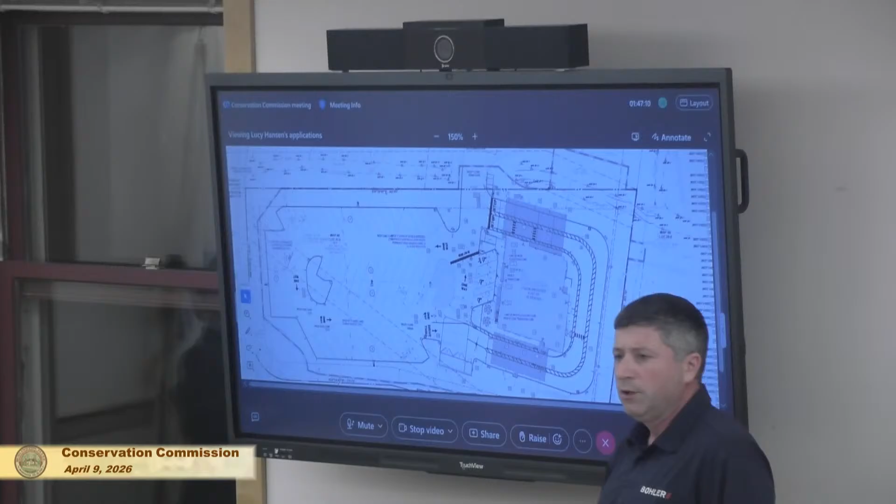Can you show how the water is going to that manhole from the parking lot in the proposed? So everything is collected, there are catch basins throughout. Actually, if we could switch, I think it's probably two sheets down to the grading and drainage, might be easier to explain. So these thicker dash lines are representing the drain lines that are collecting stormwater and conveying it towards the existing head wall location here. Under the proposed condition, there's various catch basins within the parking area at low points, and along the drive-through at low points. All of that is being collected.

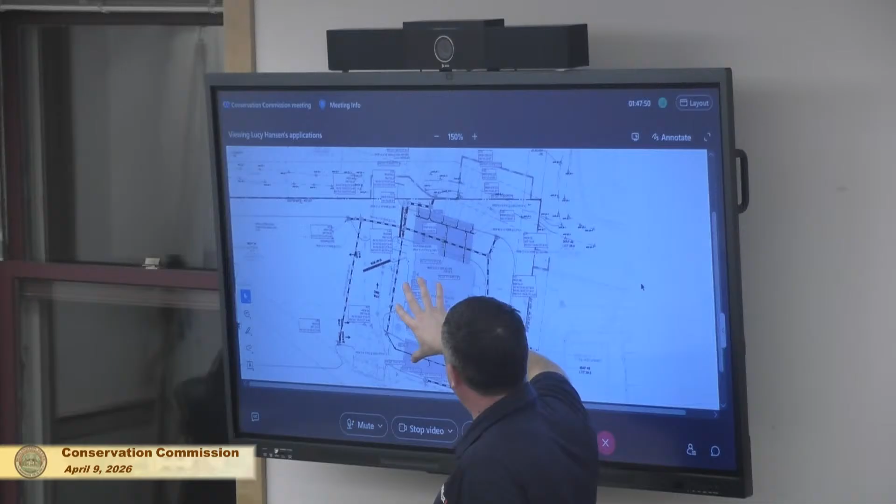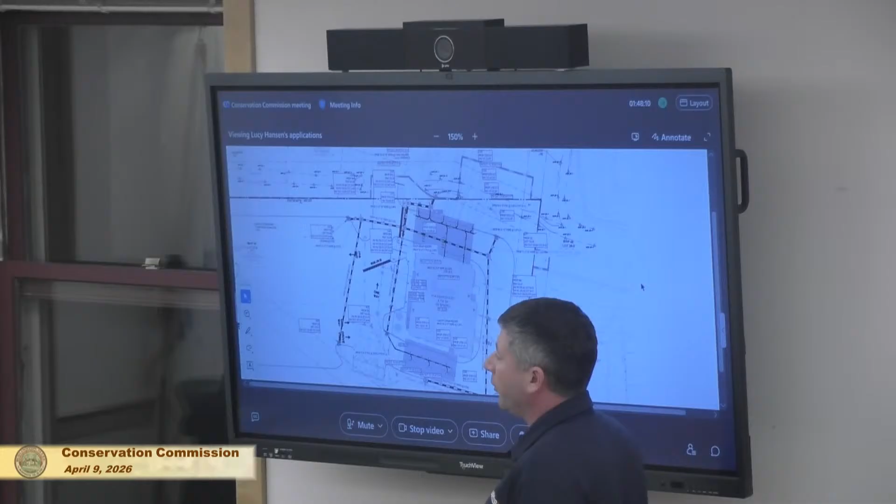This is the water quality unit here. It's being treated here, and then conveyed towards the next manhole downstream, which again is capturing all the roof areas, canopies, everything's tied into this manhole, and then tying into that existing. So the roof runoff is also not going through the water quality unit? Correct. Under the existing condition, that's what's happening today. Everything's running on land, being captured by the existing catch basins and routed towards the head wall. Got it.

All right, so now we're going to go to staff and see if Eileen and Lucy have comments or questions. Okay, well, I made quite a few notes as I went through this one, so I'm going to bounce through them, give some highlights and ask some questions. I'd appreciate it if you just list the questions so that we don't keep having to come back. Is that okay? Sure. Before you do that, this is redevelopment, could you refresh the commission's memory on what's required under Riverfront for redevelopment?

Well, okay, so that's two different things. In this case, this is going to be a redevelopment under the stormwater standards, which means they only have to meet certain standards to the fullest extent that they can. And they're mostly treating it as redevelopment under the riverfront as well, except that I think they're addressing the undegraded part, the part that was maybe just under the deck, as development, so that they can address the mitigation. I don't understand that. Okay. Yes, so stormwater, 100%.

So there is a 975 square foot area where we're essentially proposing a surface style change. Under riverfront, if you go from pervious to impervious, you need to make good for that. There is currently an area in front of the existing restaurant, and I have that graphicked out in my notice of intent package, about 3-4 pages in. It's a red polygon shape, approximately where the proposed drive-through awning will be. That is currently a grassed landscape style area, right about there.

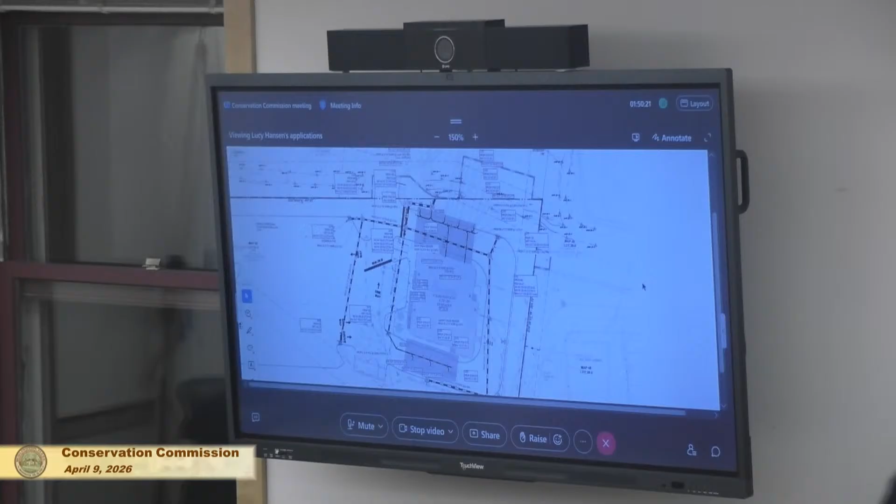And we just need to make good on that. And that is what we're doing with the invasive species management areas. Could you reframe what you just said? I'm not sure I understand what you're saying.

That little portion they're treating as new development because it's not currently paved, basically. Correct. It's grass, and the building's going to be there and we just got to make good on it. So that's the portion that they're treating as new development under the Riverfront Act. But everything else is already paved or degraded, so it's all redevelopment under the riverfront.

So the portion that's new development is the portion under the bridge? No, it's the landscaped area right next to the patio. Right next to the patio? Yeah. Okay. Currently got mulch and I think a tree. All right. Okay, so how about I hop down through my notes. Sure. I'll just do highlights, a lot of which they already said.

The parcel's only about 1.5 acres. Existing building is just about 8,000 square feet, and according to my measurements, is 14 feet from the river at the closest point. That's going to be demolished. The new building will be quite a lot smaller, 4,791 square feet. That'll be a little bit further from the stream, 37.5.

But the pavement would be 13 feet from the stream, and the drive-through awning would be 12.5 feet from the stream. They have yet to go to the Board of Appeals. They have to go to the Board of Appeals as well, because that portion of the awning, like the pillar or something, is only 6.5 feet from the property line. They haven't done that yet.

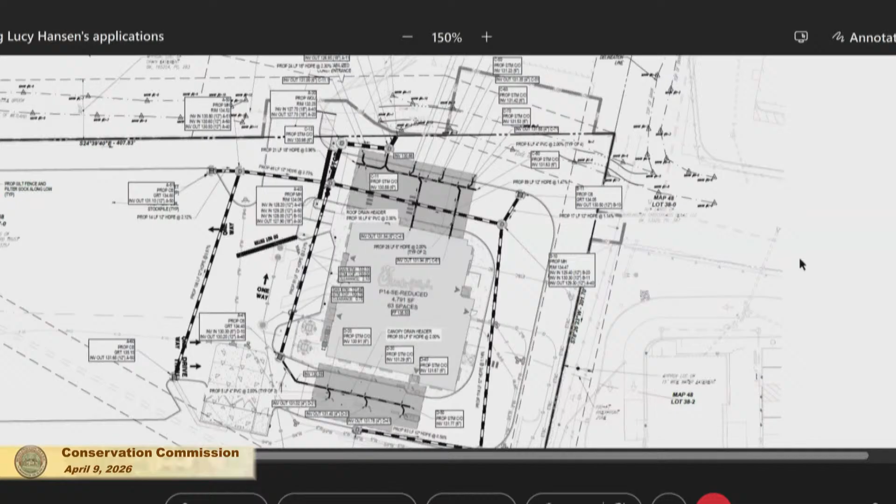The only part I'm less enamored with is the plantings that are around the rest of the site. A lot of them are cultivars, and two of them are not native to this area at all. Really? Okay. Where is this? It was the hydrangea quercifolia, and... Where are these on the plan? If we go onto the landscaping plan, you would see them. They're in various places, including one little island in the middle of the parking lot that's proposing one tree.

I'm wondering if we can do more for landscaping somewhere on the site. So that's one thing: can we do more for landscaping, and can you please change those species? And then when it came to the stormwater report, they are claiming that this is not a LUHPPL, which we just dealt with in the last one, which means that there's a lot of traffic movement on the site. I'm not saying it is definitely. I'm just wondering whether you can definitively say that, because you haven't actually done your traffic report yet.

And from what I understand, a Chick-fil-A is a very, very high traffic site. Correct, yeah. So I don't have the final numbers, but being that it is a redevelopment with two existing restaurants there, I'm not sure what that delta is. We can certainly get back to the board on that. We did include a long-term maintenance, but we were claiming there wasn't a LUHPPL, but we can certainly look at that again once we have our final numbers.

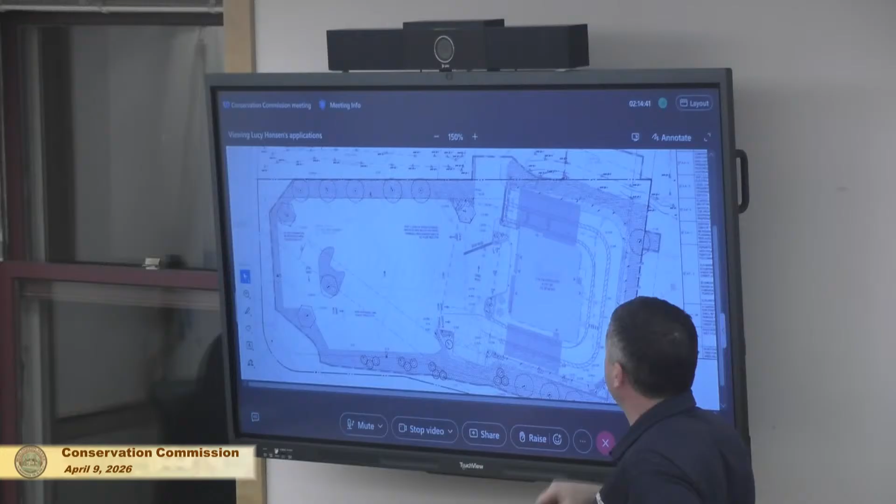I can describe a few of the areas that are critical here. The existing retaining wall on site is basically right at the edge of this landscape bed. This is a pretty high retaining wall with a fence on it, so that is our one constraint. Our second constraint is obviously the location of Little Brook. Through the development process we looked at various concepts and layouts. Chick-fil-A has already reduced the size of this building. These buildings are typically around 5,200 square feet.

So we've taken off about, I think it's 12 feet off the edge of this side of the building. So the kitchen remains the same, they just removed some of the interior dining area, so our seat count's less than the prototypical. So in order to try to squeeze the site as much as we can, this was the direct result of that. So we did reduce the building footprint just to reduce the amount of... But it sounds like the building footprint was reduced towards the Cambridge Street side. Correct, yeah, to pull everything further away.

And you can't do it on the other side because? The retaining wall is right up against the drive. Oh, I see, you need it for the drive-through. Correct, yeah, so our drive-through is here, that retaining wall is probably about 8 feet at its max height. We're not pulling that back. And pulling the whole project 5 feet forward doesn't do much because the river's right along. Yeah, it's the entire lot.

Okay. Which way do the cars flow there? They come in from the bottom? Counterclockwise, yeah. And what's the bottom awning for? Is that for placing your order when you go around the top to pick it up? Correct, yeah, so if you've been to a Chick-fil-A, this is where, under peak times, like lunchtime and dinner times, they'll have team members out in the drive-through that will be taking orders. So the canopy kind of takes the team members out of inclement weather, as well as customers ordering in there with the window down, rain's coming into your car. So that kind of protects both customers and team members.

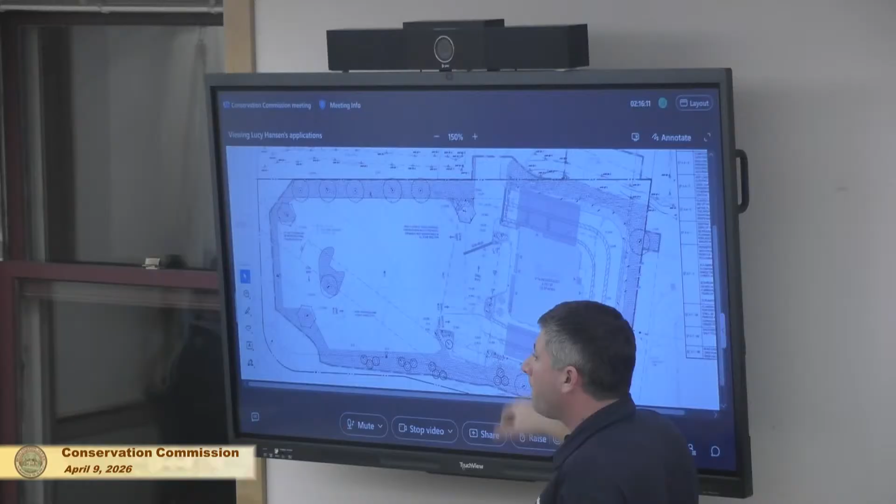So your driveway is closer by about a foot or two, right? Is that correct? Yes, that top clip. So if that doesn't comply with the riverfront regulations, do you need a waiver from us? No, it does comply with the riverfront under the state. It's your bylaw that we're requesting the waiver from, the 20-foot. So that's why we submitted the waiver. So we're compliant under 10.58(5)(g). So the fact that the driveway is closer, you don't need a waiver from us for the riverfront? We do need one for the bylaw. Oh, you do? Yes. Okay. All right, that's what I thought.

All the pipes that are routing stormwater, are they all being replaced? They are. You're not using old pipes or anything? The only pipe that's remaining is the portion of the existing pipe that leads to the head wall. The head wall? Correct. And everything else under the current parking lot is being replaced? Correct. With new piping as well as deep sump catch basins with hooded outlets. So you get the benefit of the hooded outlet as well as the water quality unit for increased water quality benefits, yep.

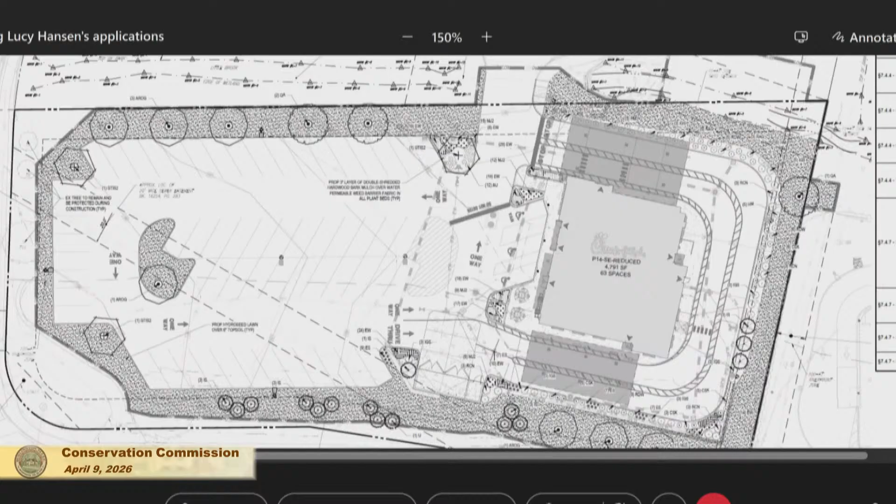Eileen, you asked for more landscaping or something? Well, yeah, it was just right in the center, you just got that one island, we didn't talk very much about it, we can talk more maybe next time. Okay, just got that one island with one tree, and we're talking about reducing the amount of lawn. Yes, if possible, exactly. And there's going to be a determination on whether it's a high-intensity use area? Correct. And there was a question about percent reduction of TSS. Did you have that down? Yep.

Eileen asked why you couldn't do more infiltration. You mentioned that? Me too. Okay. And somebody asked for a table of before and after volume. Nice, easy way to assimilate it. Okay. And somebody asked for 20-foot and 50-foot lines. I think that was Rob's.

Something about location of trees on plans, are they sufficient? Was there something on that? It's the cottonwood trees. They are on the survey, I was just asking about the cottonwoods, the big ones, are they gonna be included? If they were not present in the landscape. Oh, okay, the existing trees, you're going to make sure that's on the plans. Correct. They're there, we'll highlight them so it's a little bit clearer to see. Okay, that would be good.

A question about clarification of borings? Yeah, I see the boring log and I don't see any water level, so it did not hit any water. So they didn't encounter it. I was looking at them too, there is a heavy fill layer on the site. The fill is down to about 8 feet, which we'll have to communicate with our geotech, because typically you're not infiltrating in fill. Typically that's considered Class D soils there. We'll talk to our geotech crew that did the borings and confirm that as well.